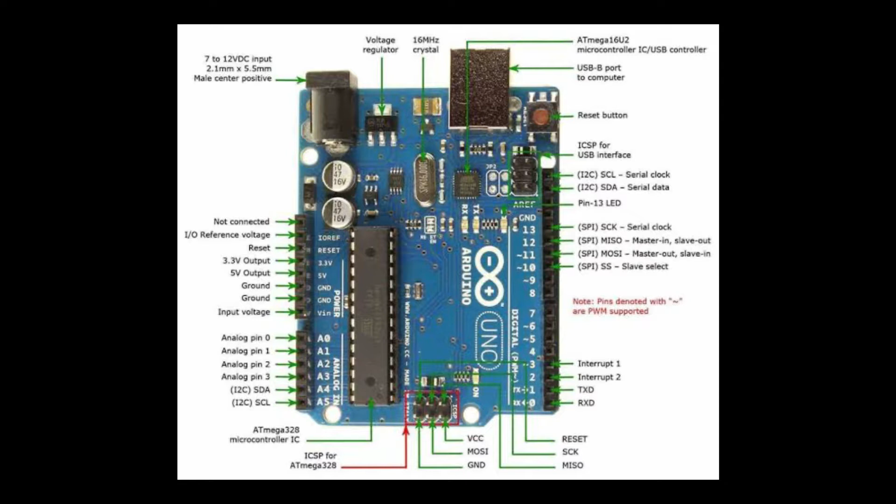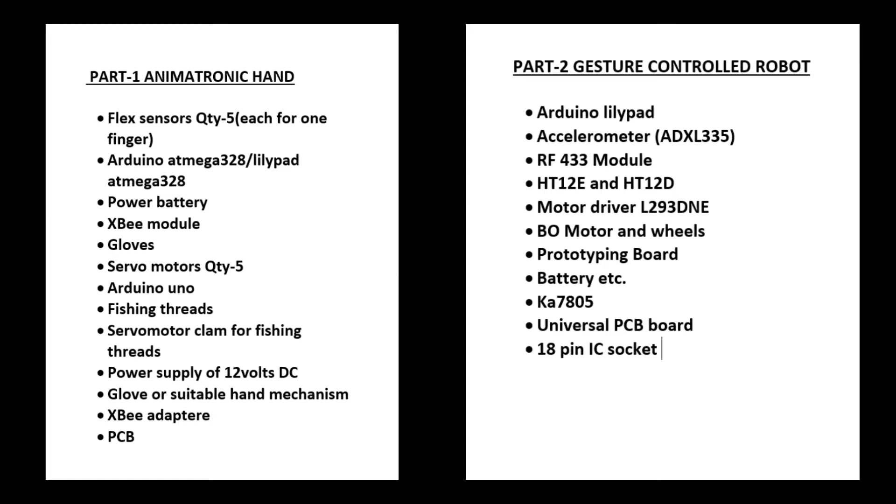We have divided the project in two parts, the animatronic hand and the gesture controlled robot, and these are the components used in building this project. I have given the list of components in the description as well.

Both the parts are controlled with one transmission system fixed on this hand glove. It consists of Arduino powered flex sensors and wireless data transmission modules. This basically is the brain which controls the whole system, which is further controlled by the operator wearing it.

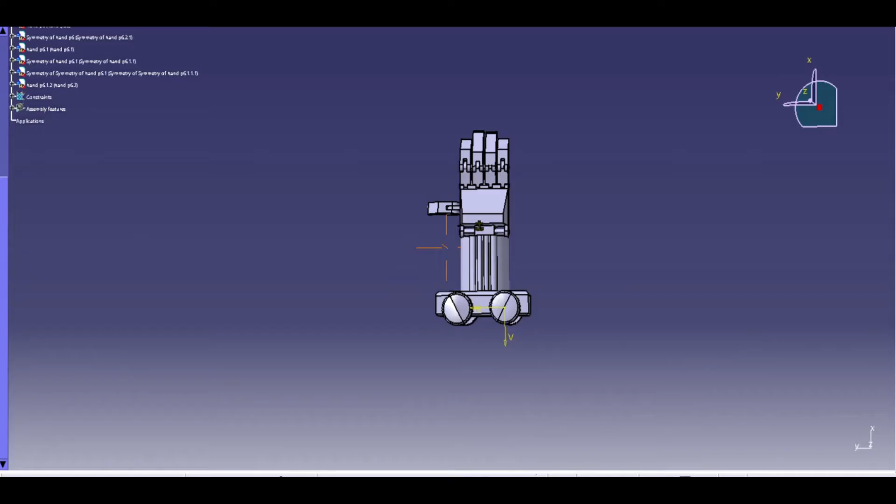This simulation here shows the graphical representation of the ideal robot we believe to build. We have designed it keeping all the components and their connections in mind.

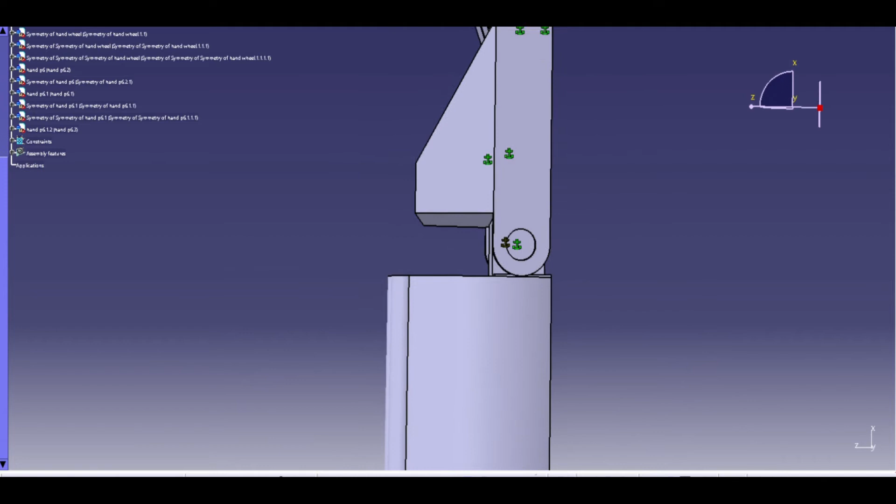This hand detects the gestures made by the operator wearing the glove and reacts to them. Flex sensors read the angle of each finger and transmit them to the robot. The robot takes the same angle of the finger and moves its fingers using the servo motor connected to each finger. The wrist movement determines the robotic vehicle to move in a desired direction.

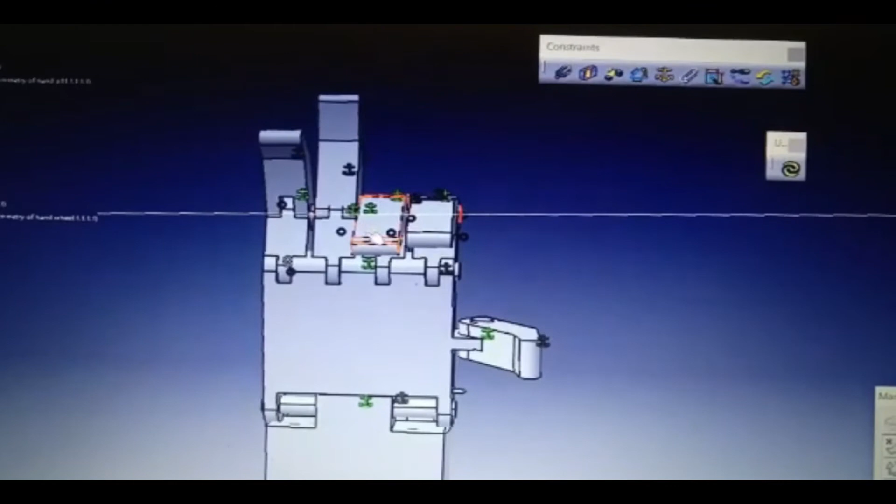If the wrist is moved in forward direction, the vehicle moves forward. If the wrist is slightly tilted towards right, the whole system moves towards right, and thus we can move the whole system in any desired direction.

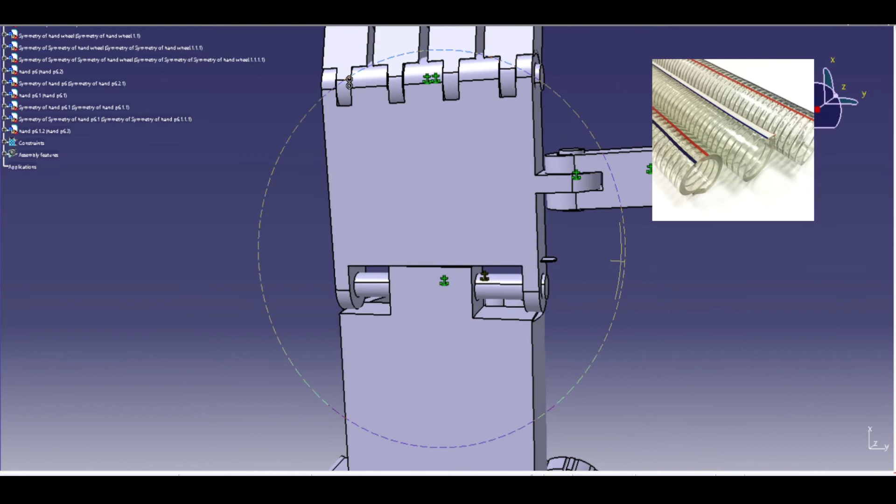Part 1 is the main operation of the project, where sub-operations are held. Here we will be using components like vacuum pipe, gas sensor, temperature sensor, and IR camera. All the components are fixed to these fingers.

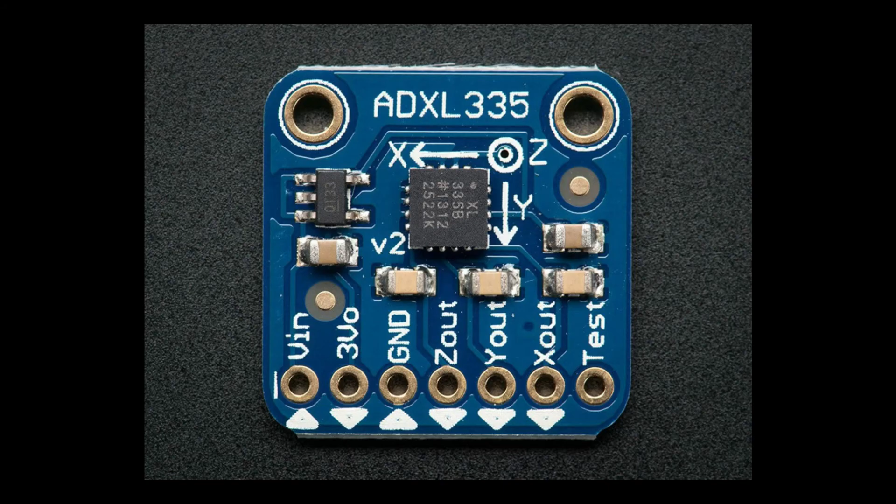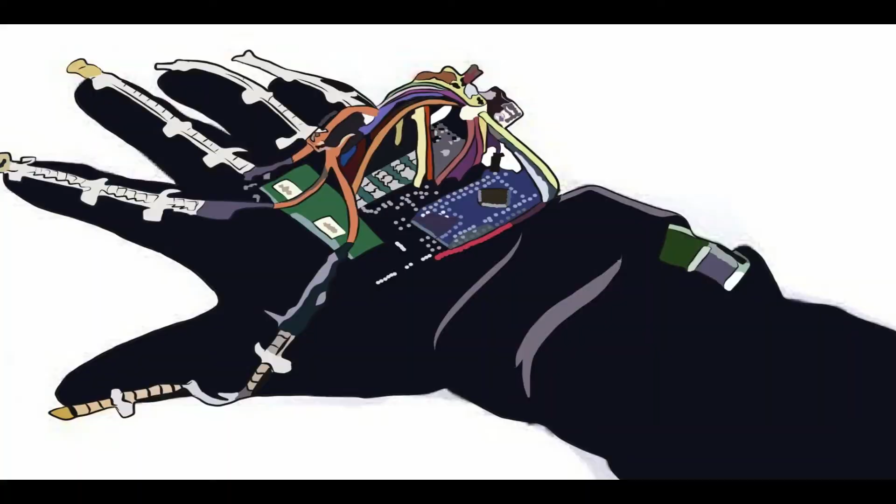Part 2 primarily focuses on moving part 1 from point A to point B. It is built using accelerometer applications. The wrist gestures are encoded and decoded using RF modules. The encoder and the RF module transmitter are in the transmission part, that is on the glove. The decoder and the RF receiver are connected to the wheels using a motor driver.

Once the robot is built and sent into a tank, the gas sensor detects any sort of gas and measures it in ppm. The temperature sensor measures the temperature and humidity around. The IR camera captures the surroundings of the tank, and the pipe can be extended and connected to a vacuum

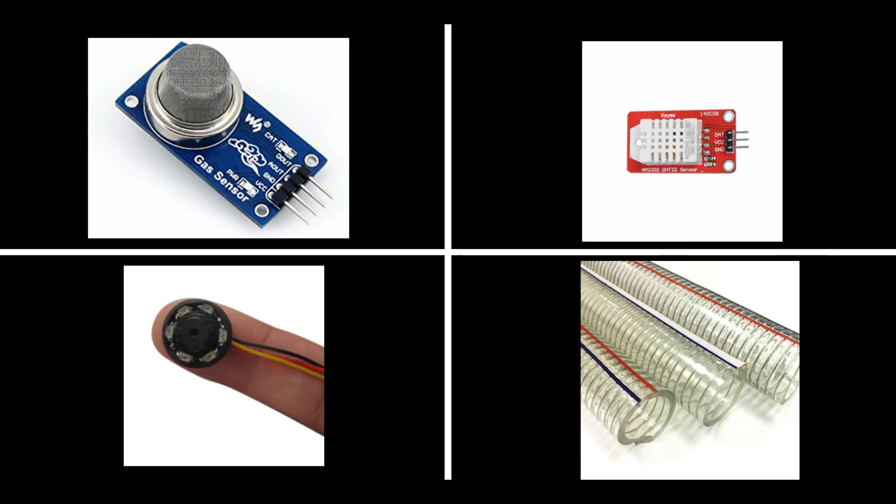pump to pump out any harmful gases. This vacuum pipe can be used to spray the interiors of the tank. This robot is highly efficient, easy to understand and operate.